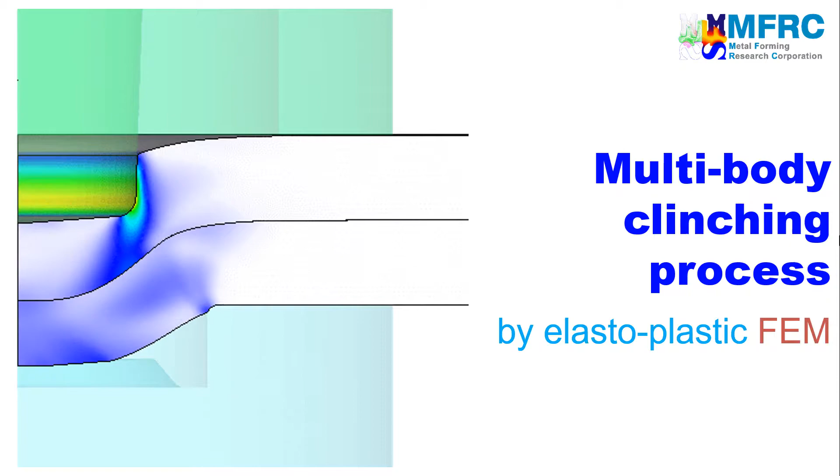In this video, you will learn how to simulate a multi-body metal forming process called clinching using the isothermal analysis module of AFDEX 2D, the Intelligent Metal Forming Simulator. Let's get started with the process type first. Since the geometries of the workpiece and the dies are axisymmetric, we will carry out a 2D axisymmetric simulation. The temperature change is neglected in the simulation, that is, this will be an isothermal finite element analysis.

The information about the material is given on the left side. The dimensions of the workpiece are as shown in the figure on the left. The material of the workpiece is an aluminium grade and its initial temperature is equal to that of room temperature. Soap-based lubricants are used in this forging process. Therefore, a corresponding friction formulation will be selected. A constant velocity condition will be used in this simulation because the material is rate independent.

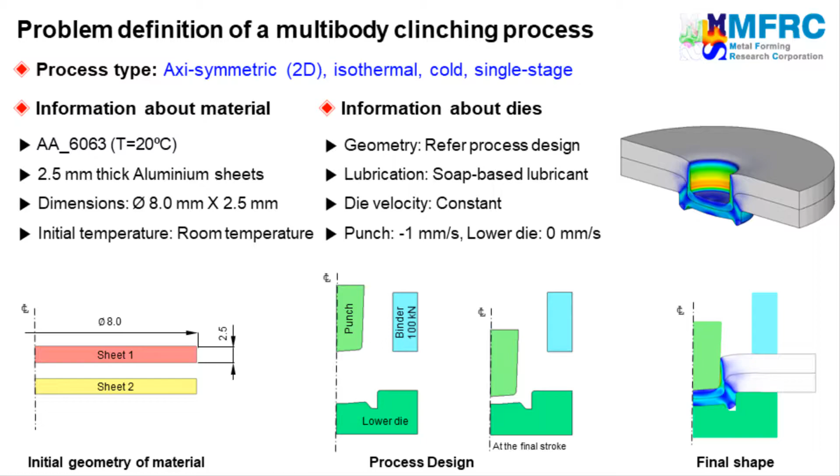The upper die will move downward with a constant velocity of 1 mm per second and the lower die will remain stationary. A blank holder force of 100 kN will be imposed on the binder die. The problem definition is complete. The result of the simulation can be seen on the right side. The two aluminium sheets will be joined without the use of any additional components such as a rivet in this process. So now, let's see how we can simulate this clinching process using AFDEX.

Double-click on AFDEX icon to execute AFDEX in your computer. Click on New to define a new process. In this process information window we will clearly define the process type. This is an axisymmetric cold forging process. So we will make the selections accordingly. Select cold forming and 2D axisymmetric simulation. We select Newton as the unit of force. So the unit of stress will be megapascal.

This will be a flow analysis, which means only the mechanical effects of deformation of the workpiece will be considered in the simulation. Select elastoplastic deformation type. This means the elastic component of deformation is also considered in the simulation in addition to the plastic deformation. Since this process does not have any flash, select regular type under flash. Click OK. This is the main window of AFDEX. We will use the toolbar to set up the simulation step by step.

First step is to import the geometry. Click on Model, from File and then select the geometry file in DXF format. Click Open and then click OK. Click No to not make the overall process automatic. We will assign the geometries to the dies manually. Note that you can get this geometry file inside your AFDEX installation folder.

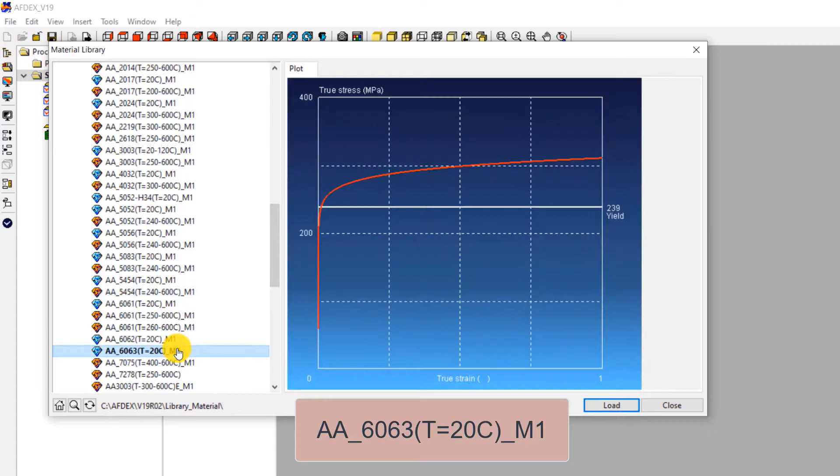Let's move on to the second step, which is to define the material property. Click on Material, from Library and then select the aluminium grade AA_6063, T equals 20 degrees Celsius, _M1 and then click Load. This will load the material into the simulation. Now click Close. The third step is to define the press machine type.

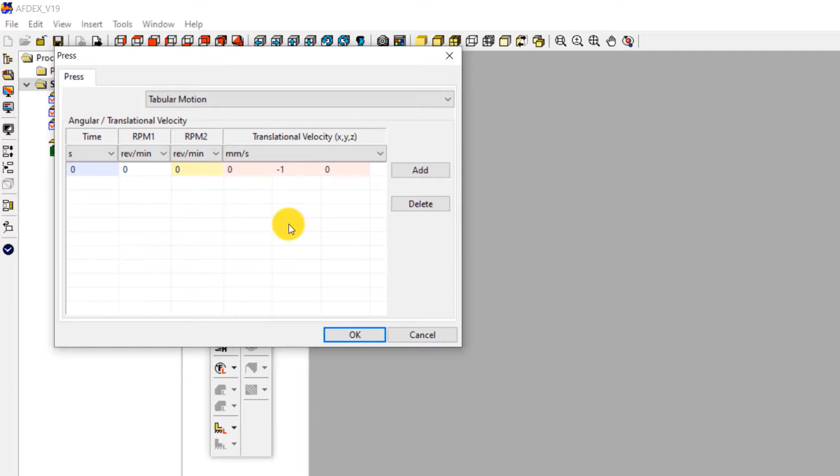As you know, we will use a constant velocity press. For using that, click on Press, Manual, enter -1 in the fifth column of the table. This means making the press move downwards, in the negative y direction, with a constant velocity of 1 mm per second. Click OK. The fourth step is to select the friction formulation. Click on Friction, from Library and then select soap_cold, aluminium, click Load and then Close.

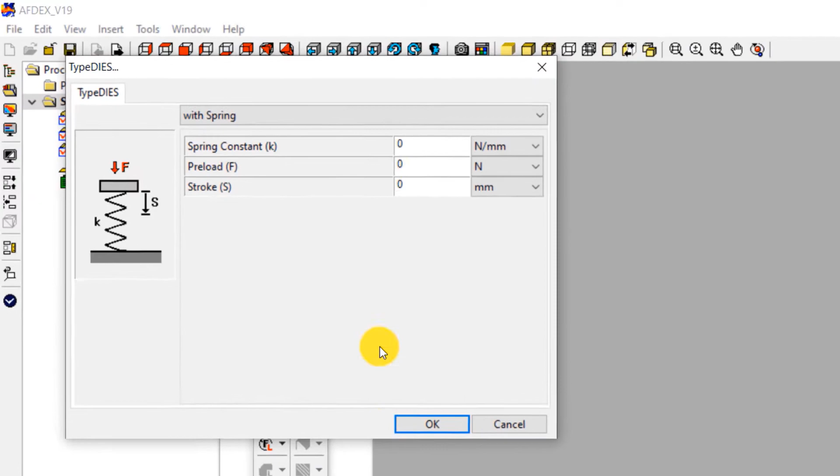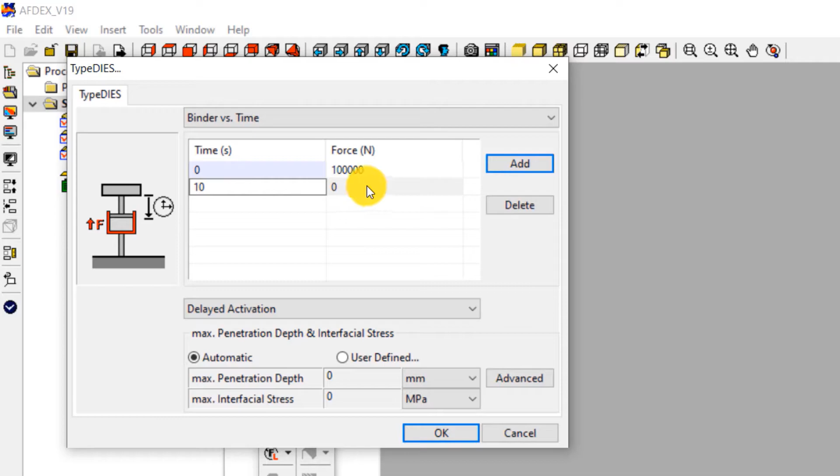The next step is to define the blank holder force and the force exerted by the ejector on the workpiece. For doing this, click on Die Type Manual. Select Binder versus Time from the drop-down list. Click Add twice. This will add 2 new rows for data entry. Now enter data as you see on the screen. For a time of 0 second, enter a force value equal to 100 kN. For a time of 10 seconds, enter a value equal to 0.

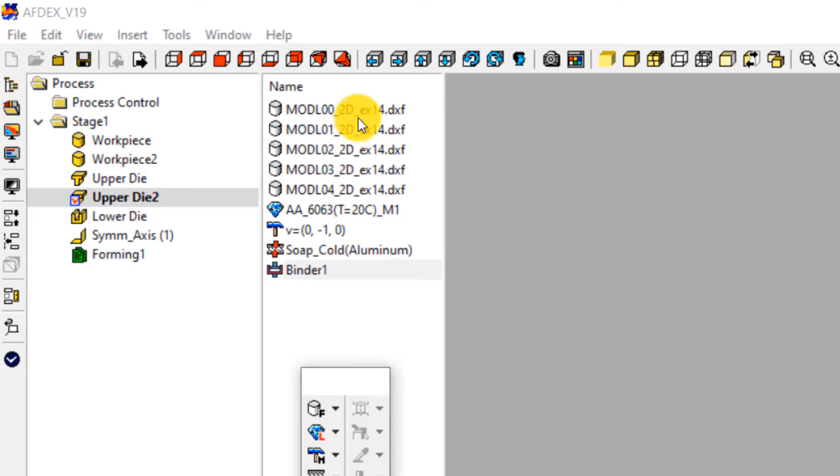Click OK. Since this is a multi-body process, we need one more workpiece. For this, right-click on Stage 1, and click on Insert and then click Workpiece. Similarly do the same for inserting one more upper die. Make sure that you have 2 workpieces and 2 upper dies and 1 lower die in total. The properties that were loaded so far will be assigned to the respective entities now. Select the geometry file starting with MODL00_2D, drag it and drop it over upper die.

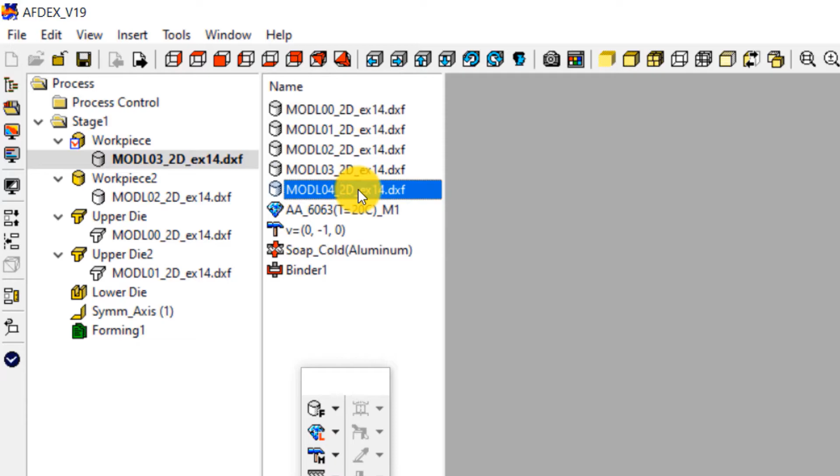Select the geometry file starting with MODL01_2D, drag it and drop it over upper die 2. Select the geometry file starting with MODL02_2D, drag it and drop it over workpiece 2. Select the geometry file starting with MODL03_2D, drag it and drop it over workpiece. Select the geometry file starting with MODL04_2D, drag it and drop it over lower die.

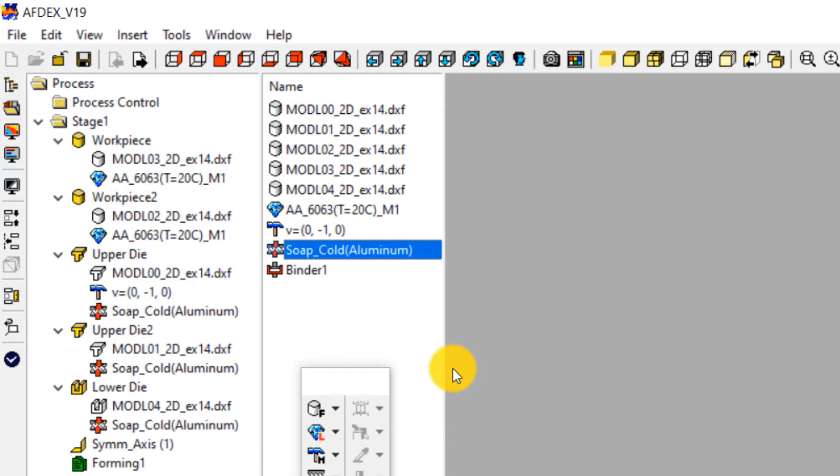Right-click on the aluminium grade and select to workpieces. This will assign the material grade to the workpiece. Select V equals 0, -1, 0, drag it and drop it over upper die. Right-click on soap_cold, aluminium, and then select to upper and lower dies. This will assign the friction formulation to all the dies in the simulation.

Select binder 1, drag it and drop it over upper die 2. Now we have completed the definition and assignment of properties to the dies and the workpiece. The next step is to position the dies properly. For this, we will use the Positioner tool of AFDEX. Double-click on Stage 1 and click on Positioner icon on this toolbar.

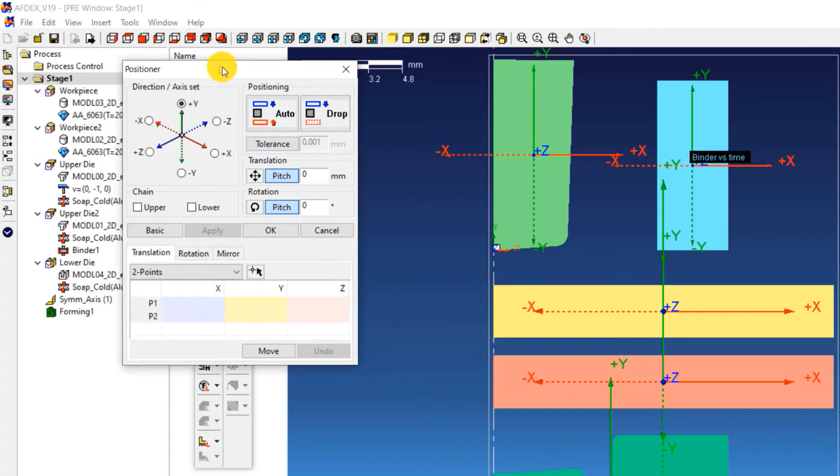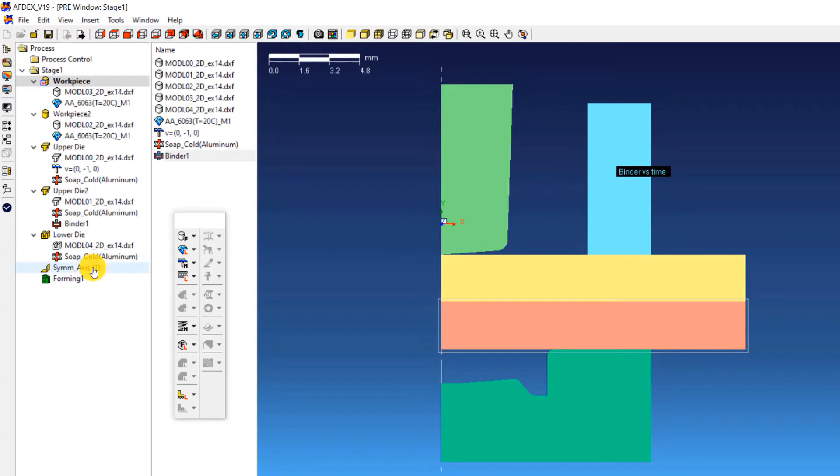Select Workpiece and click Drop. This will drop the workpieces on top of each other. Click Auto icon now. This will enable automatic positioning of the dies. Click OK. The next step is to define the properties such as stroke and number of solution steps. For Stage 1 stroke definition, double-click on Forming 1. This will open the Forming Control window of Stage 1.

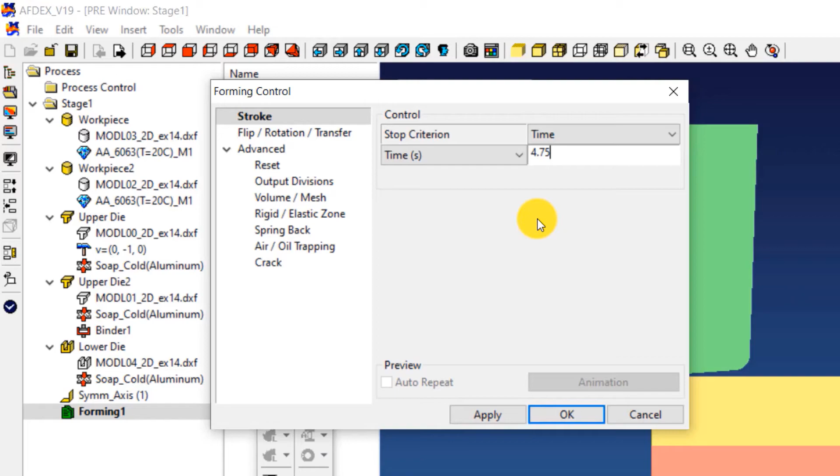Select Time from the drop-down menu next to Stop Criterion and enter a value of 4.75. This is the stop criterion for the stage, meaning that, when the process time reaches a value of 4.75 seconds, the solver will automatically stop the simulation. After doing this, click on Output Divisions. We will increase the number of solution steps used in the simulation. Select User defined below number of solution steps. Enter a value of 300.

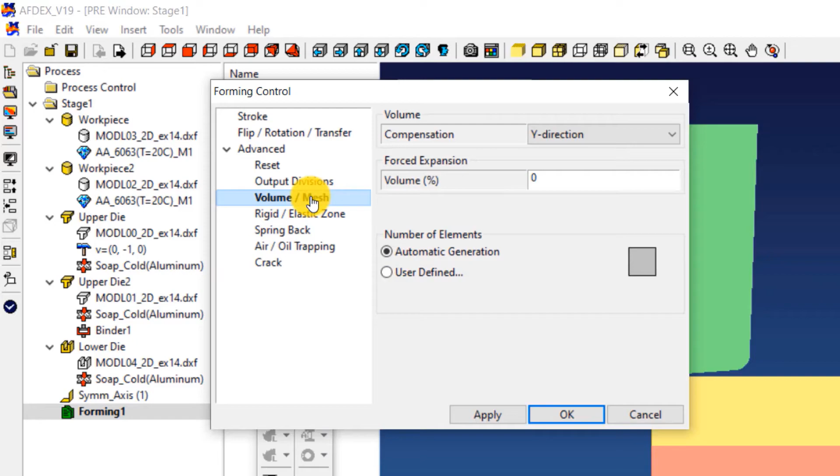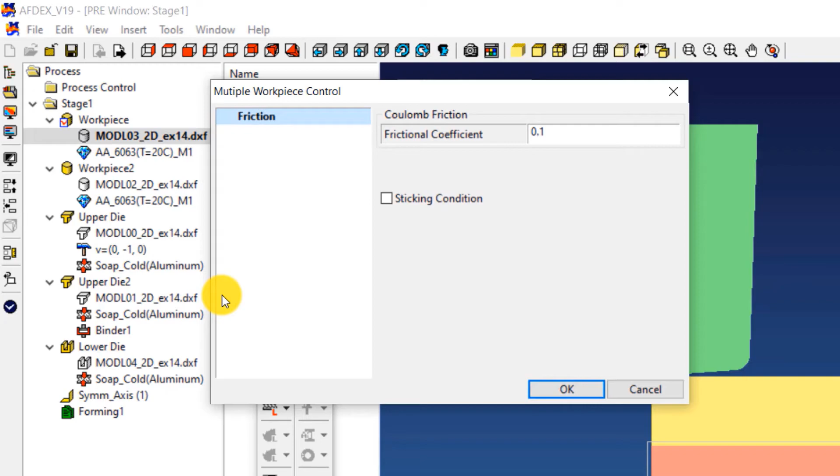We will also increase the number of elements used for meshing. To do that, click on Volume/Mesh and then select User defined. Enter a value equals 3000. Now click OK. The next step is to set the coefficient of friction values at the interface between the workpieces. To do this, right-click on the DXF file below Workpiece. Select Friction and Initial State Value. Make sure that a value of 0.1 is entered and click OK.

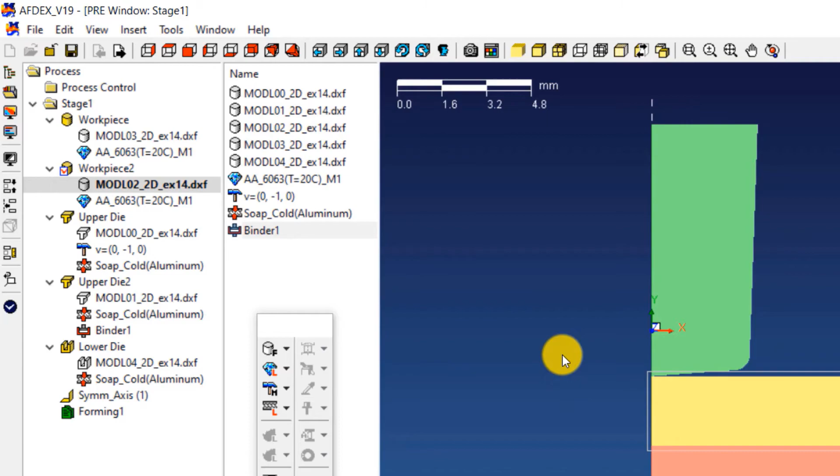Similarly, right-click on the DXF file below Workpiece 2. Select Friction and Initial State Value. Make sure that a value of 0.1 is entered and click OK. We are almost done with the simulation setup process. We just have to save the simulation, check, and run it. Click on the Save icon, enter a file name, and then click Save. Your simulation file is now saved.

The final step is to check the simulation to see if we have set it up correctly. Click on the tick mark button on the toolbar. In the window that opens, click Check. This will let you know the error messages if there are any. There are no error messages in the simulation, but we can see that there is a message in the Notice section. Click on that number to see the details of the notice message.

The message claims that information about velocity has not been defined for one of the dies as there is no press data. This notice message can be ignored though, because if a user does not define velocity for a die, AFDEX automatically assumes the die to be stationary. After making sure that there are no error messages, click Run.